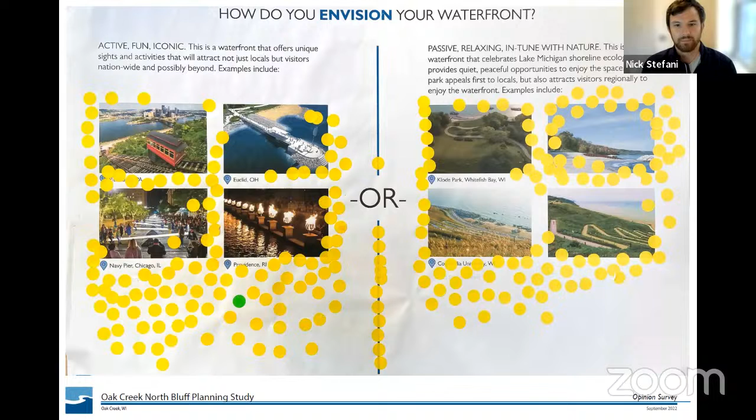So this is the summary of those options. Obviously it's pretty close down the middle. Good vote for something active, fun, and iconic, which typically comes with added cost, something we wanted to consider and keep in mind.

So we kind of had a split down both options. As you'll see, we kind of start with a more passive approach and then work our way to more intense or more active, which again is added cost, which we're fully cognizant of.

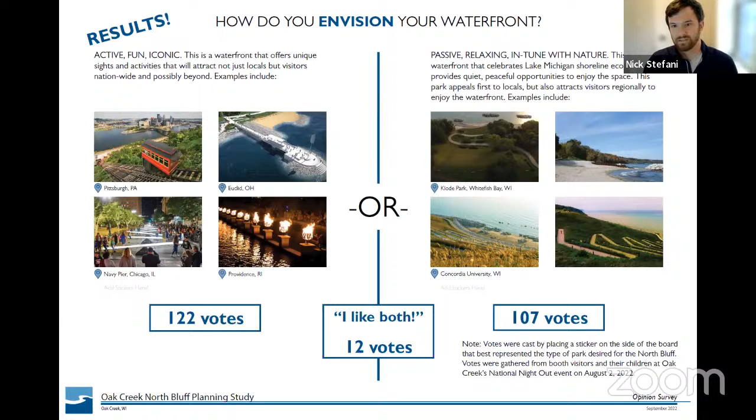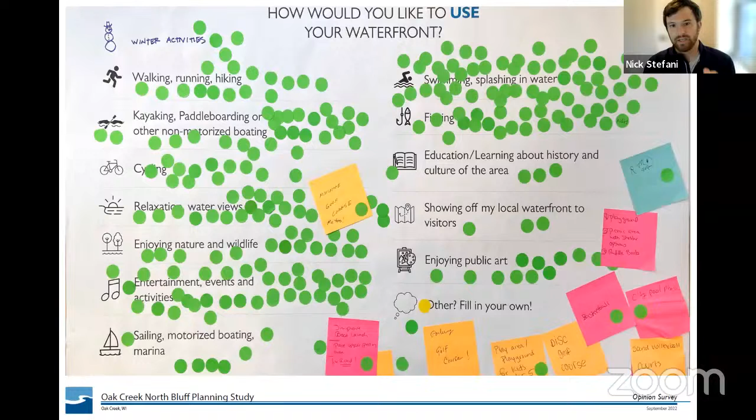In addition to that, we also wanted people at this same night to place marks and votes for what sort of activities they wanted to include at this site as part of this planning effort.

So these are the results. Swimming, splashing in water, was obviously the highest preferred.

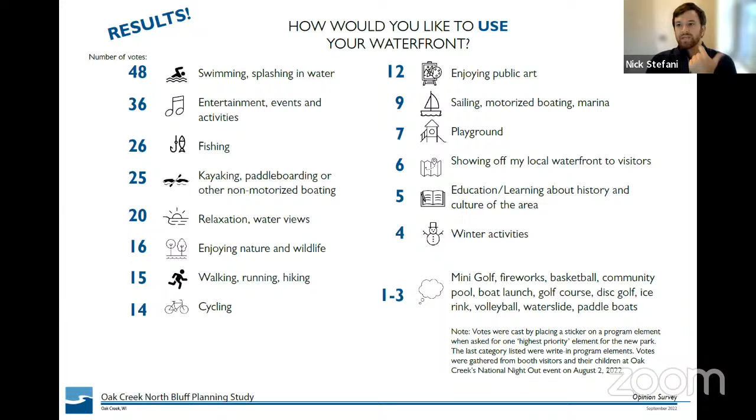Me, Dennis, Greg, and Ben were able to walk the site from basically north all the way south to Bender Park to get a good appreciation of what sort of infrastructure, facilities, and activities are currently there. We actually came across a good amount of swimming access at Bender Park, and a little bit also north of the MMSD site.

It's not nearly as popular, and there aren't many people there, but it's a very nice beach on the north side of MMSD. Part of the challenge with this particular site is that we are fairly constrained to our footprint that we're going to be able to use.

And given the way the site is laid out, there's not a lot of good opportunities to build a beach into the shoreline protection at this particular site.

So where we're going with access to the water is a little bit different, and it's not going to be quite a traditional swimming beach, but we are going to provide some options on how to construct this revetment in a way that you can still come and get close and touch the water.

Other things we keyed in on were kayaking and paddleboarding, non-motorized stuff, and being able to do different sort of activities instead of passive entertainment.

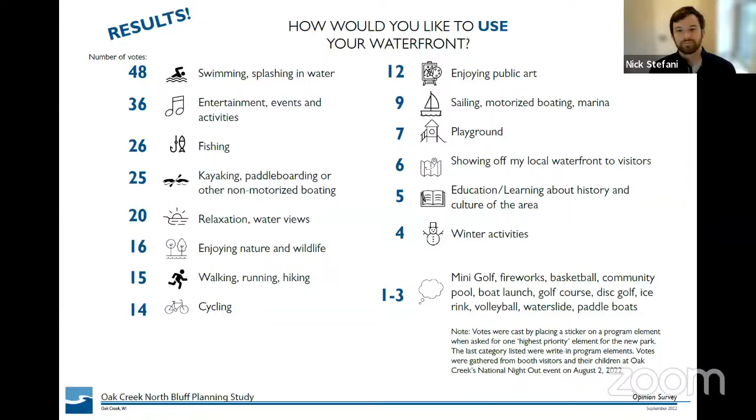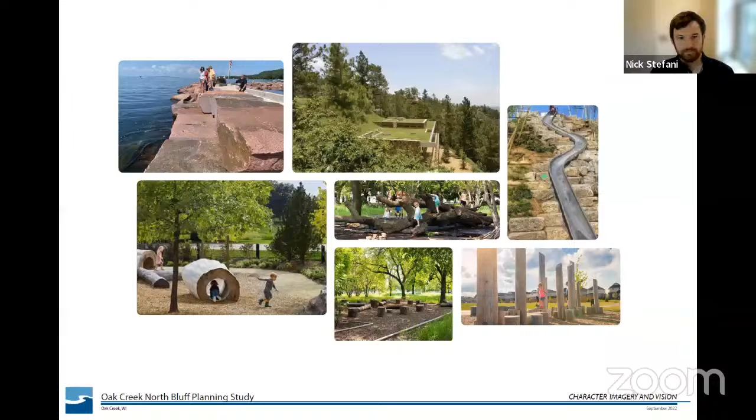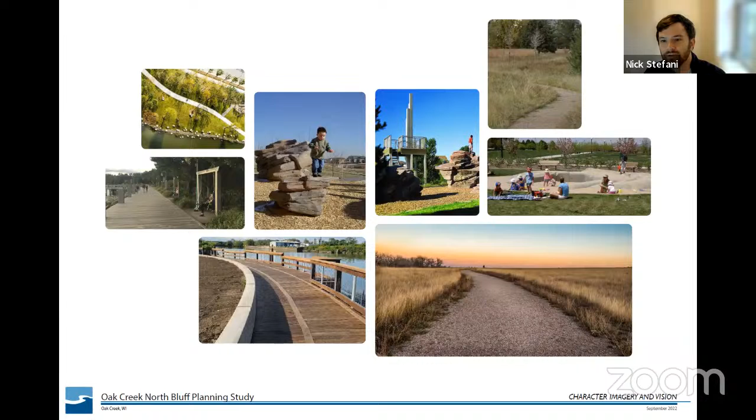At this point, I'm going to pass it off to Dennis, who was also there at the design charrette we had with the city. He's going to walk through some of these concepts and images that we put together.

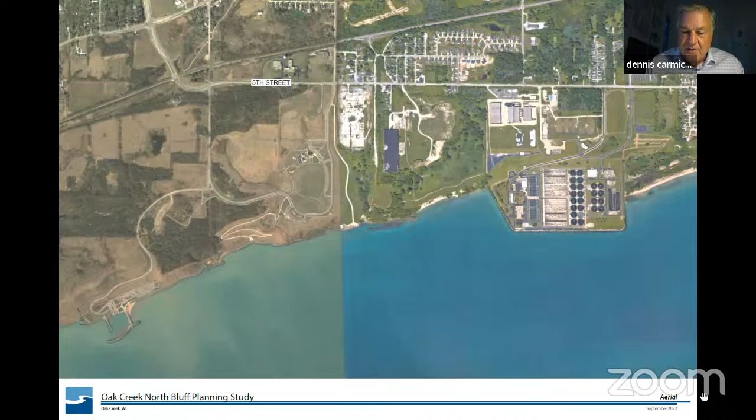Okay, good, thank you. Our team came to Oak Creek last month and spent 3 days walking the entire site from north to south, starting at Bender Park and walking to the north side of the water treatment plant. The North Bluff project is in the middle there. One of our conclusions from that walk was that North Bluff is not only a potential destination on the shore as a recreational asset, but a critical link into a longer piece of connective walkways for bicycles and pedestrians from north to south. We're quite excited about that.

We think there's a lot of opportunity here to create more than just the sum of its parts, more than just this site and its potential use. We spent 3 days working in City Hall, and most of the drawings we're going to show you tonight were created during that charrette. They're very quick, loose, and freehand—not very sophisticated. We wanted to present them in their unfiltered, unpolished version, because we have 4 alternatives to share with you this evening.

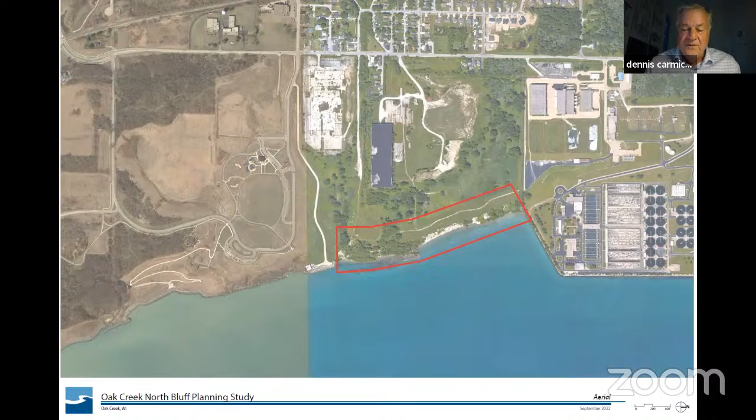We also shared these with the Parks and Rec folks last week, and we really are here to seek your input. So we will create more polished, finished graphics, but we thought it would be smarter and better for you to help guide us by showing you the raw, unfiltered drawings and the ideas that emanated out of that.

This shows the land use. You're aware that Lake Vista is a beautiful park with wonderful meadows and access down to the lake as well as upland areas. It has what we call a high road, a path at the top of the bluff, and some low road paths near the lake that people have worn down themselves—narrow and not official, but we applaud that. We think part of what we should be thinking about is creating more of these pathways, both high road and low road, with multiple options for people to traverse both elevations, and places within North Bluff for people to go from high to low that are accessible. That's part of what we learned from that walk.

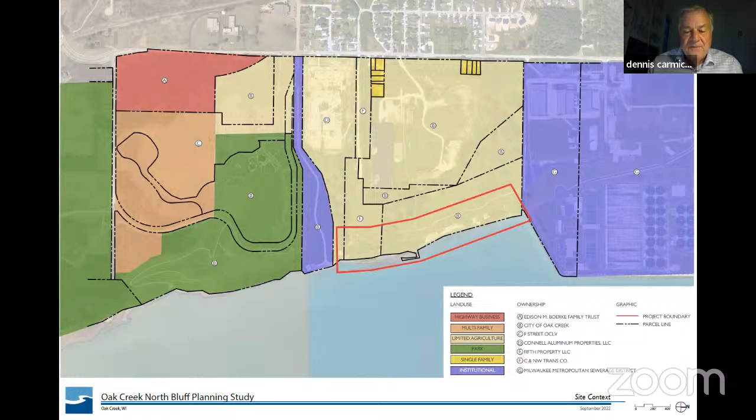Here's an analysis that begins to show some of the land uses and the potential. If you look carefully at the area of Lake Vista, we've rendered in the proposed residential development there, because we understand that is about to happen. It isn't there today, but it suggests the scale and the grain of that, and the fact that lots of people will be living there.

It also suggests some pathways from where they live into the green park of Lake Vista, and also down to the bluff. The magenta color on the right is an area we believe is potentially developable. Once the capping is done, we've been led to believe a similar kind of mixed-use development could occur also on that site.

So we've also considered ways that pathways and or roadways might go through and get to the North Bluff area, which is still surrounded by that red outline. One of the things that caught our attention was there is an existing road that goes down to the water intake plant. It is a secured road, and there's a gate up near 5th Street, and you cannot go through that gate unless you have a card, unless you're authorized.

It occurred to us that maybe there might be an opportunity, without sacrificing security, that there could be handicapped access parking down at the foot of that roadway near the lake, and or maybe bicycle access, because it's a beautiful road. It goes all the way down to the foot of the bluff and ends right near the park.

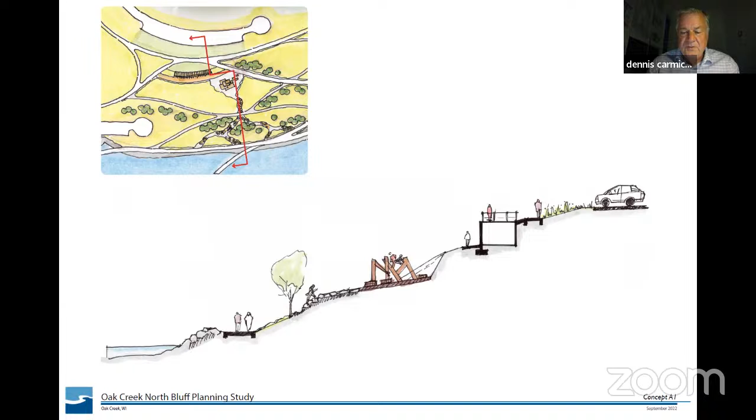This one is a slightly more active version of that same idea, with maybe a bit more rock climbing, a slightly bigger shelter building, but there's still parking on top, a little handicap parking on the bottom, and a series of pathways that wend their way up and down the slope.

What you'll notice in the pattern of the plans is there's no straight lines. One of the things we're thinking is that all of our interventions here should look as if they're shaped by wind and water, because those are the two natural forces that shape this. We're looking at a clean slate, a very clean, pristine 3-to-1 slope, so we have the opportunity to sculpt it. It's almost like being an artist, but earth is your medium.

So that's what we're proposing: these delicate, beautiful, graceful pathways that ascend and descend, many of which will also be accessible paths. There's a hierarchy of paths too — some wide, some narrow — but all intermingled with meadows, similar to what's been done at Lake Vista. We love what's been done there. The meadows are beautiful, ecologically functional, and very low maintenance. We want to emulate and extend that language of landscape with very little turf that actually has to get mowed. Most of it will be meadows.

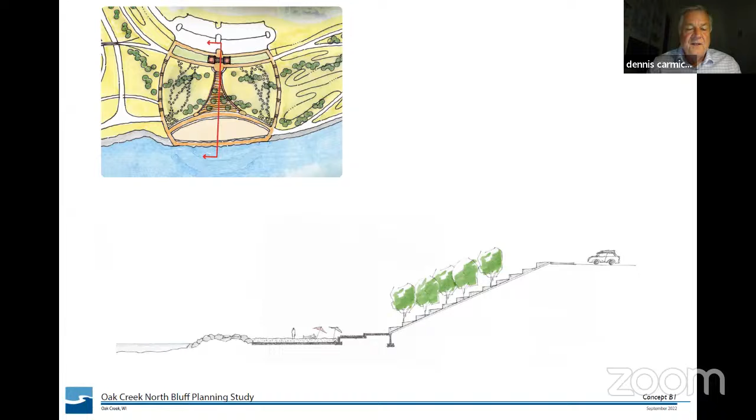You can see this notion of the perched beach where people can set up their chairs and the kids can play on the sand. It's a wonderful family activity zone.

Yeah, and this is our fourth alternative, and it shows even more intense activity. One of the things we heard from the public in a stakeholder review is they would love to see some fishing piers. So what if we did a fishing pier that goes out over the lake but curves back in? So it's not a dead end the way most fishing piers are, but it still provides that sense of getting out over the lake and allowing for fishing.

So you see that sort of parabolic shape that goes out over the lake beyond the revetment. And then you see a contained water area between the revetment and a walkway. We'll show you what that looks like in a second here. But that is not a part of the lake.

That is a wading pool. It's a very shallow pool. It is perched in the same manner that the sand beach is perched. It is not connected to the lake, so it would be chlorinated water, and we'll show you what that looks like in a second. We also have the notion here, because people wanted a landmark, we said, what if instead of the bridge, the landmark is a tower? So if you go to the next image...

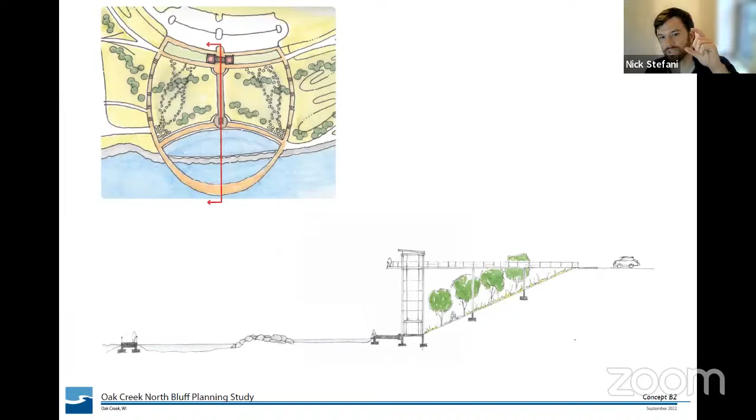Yeah, Dennis, I can start and then you can tag team for any gaps I missed. So just off the bat, if it wasn't explicitly stated, all of these options are going to have ADA options and access to various points. All of the trails that you see that are thicker are going to be graded to be ADA compliant. Some of the smaller trails in between may be steeper, maybe set up for mountain biking, so those paths won't be ADA accessible, but you'd have a similar feel to what's at Lake Vista, with long, flat slopes. We're going to try and limit the amount of switchbacks to create a different feel. But the intention is to create ADA access to the main points of activity along the bottom and along the top of the bluff. So that's probably the easiest question to address.

In terms of maintenance, no, actually I have a comment on this. When you say it's ADA compliant, are you talking about something like curb ramps for accessibility? That's on flat surfaces, but on a slope, when you're pushing a wheelchair, to go down a slab, then slope, then slab, that doesn't make it safe. So if I'm looking at the exhibit you had on the last slide showing that accessibility, or the slope, it still looks like a steep slope. If, for example, I wanted to address this, I would put an elevator somewhere so they could take the elevator all the way down. Again, I don't think having an ADA compliant slab on a slope is safe. It's mostly ADA compliant for curb ramps, not for a steep slope like this one.

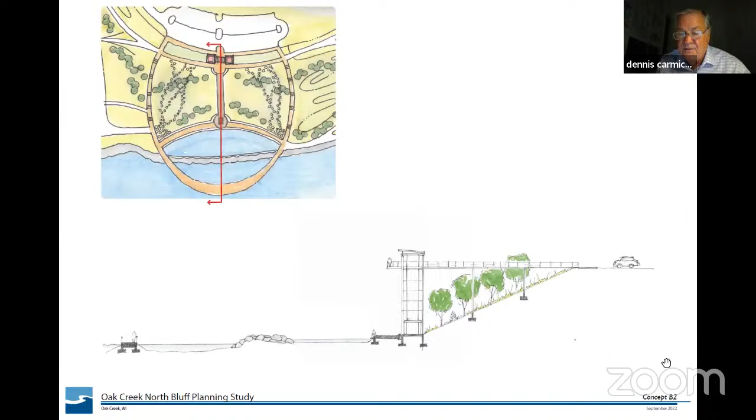Yeah, you're raising excellent points. And I would suggest that we could, in fact, put an elevator in this tower. If you all decided you're really excited about the idea of a tower but want the tower itself accessible, then the elevator is the way to go. However, that does increase the maintenance, because as we know, elevators do go down periodically. So again, what Nick is saying is there will be accessible paths that will be less than 5%, which is the ADA maximum, without ramps, guardrails, and level landings. It's just a regular slope, and there's plenty of room to do that, so we will do that under any circumstance. But you're raising an excellent point about the actual tower itself, so we could add an elevator if you all decided that was the alternative you wanted to pursue.

Go ahead, sorry. Oh, I was going to answer your other question about safety. Sorry to keep bugging you, but maybe I'm still not convinced, so I just mentioned the elevator as an alternative. And I know how costly that is, not just for installation but the maintenance cost as well, especially during the winter season, not just during summer and spring. So there's also a cost to add those curb ramps, I'm sorry, not curb ramps, the level and slope curbs for it to be ADA compliant. And also there is strain. If I'm a person pushing a wheelchair, I'll need some strength to go through that slope, stand on a flat surface, and go again through the slope. I've never seen an example like that, so I think it would be a good idea to show us a similar example to what you're proposing.

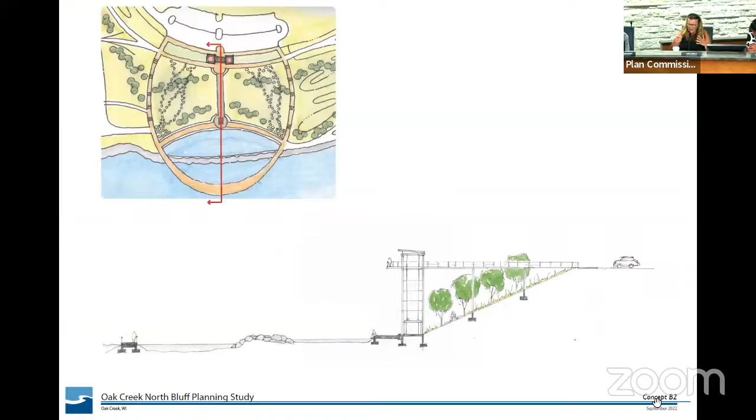And believe it or not, I usually go for the more expensive version, but I kind of like this other version better with the slides. I think that would be really interesting, to be able to stop, to be at the top and see the steps go down. I don't really see any place though for event areas. I believe to the west is a lot more parking, which was one of the things we've always been criticized for, that there's not enough parking in the park. And then bathrooms - so event areas, rental options, or where would the bathrooms be in this layout of B1?

Well, those are good questions. We didn't include bathrooms because we know that is incredibly expensive and incredibly maintenance intensive. But if you wanted them, they would likely be best located at the top of the bluff near the parking, and we would have to get access through the canal parcel to do that. So it may not be an early action item, but it's something we can certainly plan for. So sure, we can accommodate that.

I think part of our thinking here is we did not want this to become such a regional attraction that there would be thousands of people here - maybe only hundreds of people here once in a blue moon. So help us with that, help us make that decision, because we do want to make sure that whatever infrastructure we provide matches your intention for how many people you want to come here.

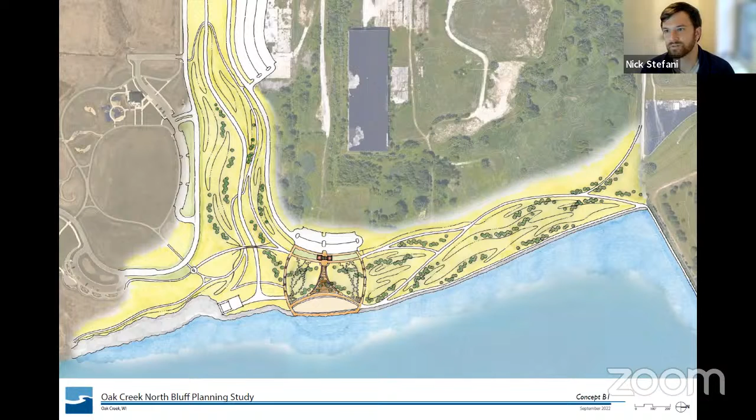Because some of the feedback we've gotten too is in terms of event space - event spaces are great, but they require people to manage those events, get those events, solicit those events. And sometimes that is or is not desirable depending on the level of desire.

Yeah, I would just love to see a place, or in the future a place, where a band could play, where you'd bring a lawn chair, something where we could gather. But I really think if people are going into the sand, or parents with children - I see it at the Drexel Town Square splash pad, those bathrooms are used constantly just to even change the kids. So maybe it's not running water, but it's a shelter or something. But I think that's going to be really important.

Greg? I guess of the different concepts, I lean towards B1, B2 - of course they're the more expensive ones. I do like a combination of the two, not necessarily the tower, I think that's kind of a little much. But I do like the stairs and the amphitheater look.

I'll echo comments that Dawn just made. Not necessarily looking for a permanent stage or anything like that, but if there's a way to lay out some of the stones - in one of the example pictures, the flatter stones - something like that towards the bottom of the stairs that was described as kind of an amphitheater look, just for a potential band to set up. Not necessarily a major event space, but just an area that could in the future be used for live music or something like that. I know that entertainment was the second most voted on item, with the first item being swimming and splashing.

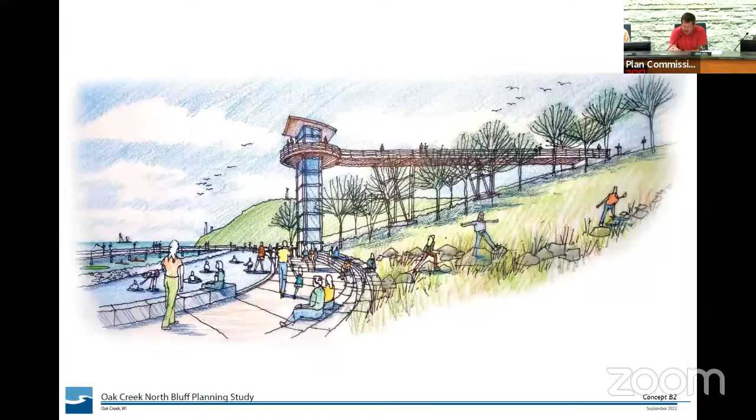Okay, and then the last thing, I really do like the concept with the slides. I know my kids and families I know, their kids would love something like that. Are you aware of 70-foot slides elsewhere that go down the slope? My only concern is we received complaints that rocks were too close to a playground in that area. I can only imagine the complaints of a 70-foot slide ending at a rocky path at the bottom. Has this been tested somewhere and proven to be safe for children to use?

Yeah, you're asking the exact correct question because you're right, I don't know of one at 70 feet. There are several in a park called Governor's Island in New York that I believe are about 40 feet tall. I've been there and slid down them and they're wonderful. They have a very long run-out area.

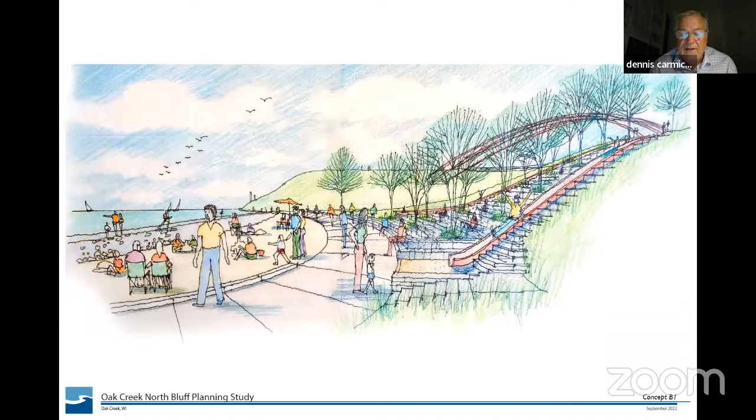Well, we totally agree with that. One of the issues we're bringing for your consideration is whether we should include handicap accessible parking down at the toe of that roadway, allowing folks with handicap tags on their vehicles to get a card that would give them card access.

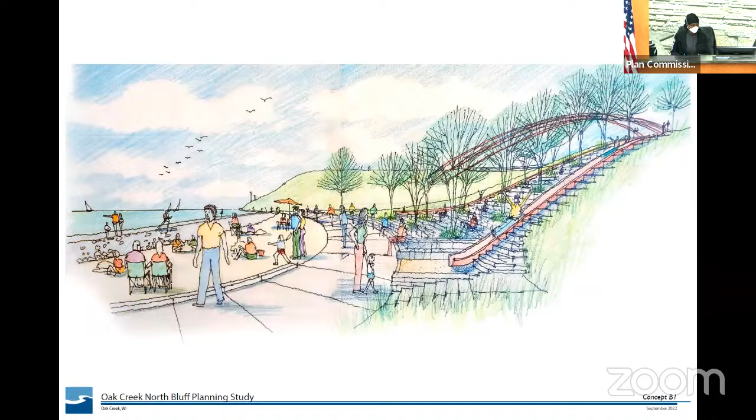Well, this is bigger than car access. This is access to this area, to the North Bluff. Yes, driving to the area is a concern, absolutely. However, you want people to have access to all levels, an upper level and a lower level. Everyone should be able to access it. It may be a different experience, but it should be roughly the same. I'd be concerned if those who are differently abled are told they can only use the lower bluff and can't go to the upper bluff because there's no accessibility. That would be my concern.

So I just want to be clear: yes, parking is a concern in terms of where you start your journey at this bluff, but while you're on the bluff, we want everyone to have a similar journey. Yes, and I'd say we share your concern.

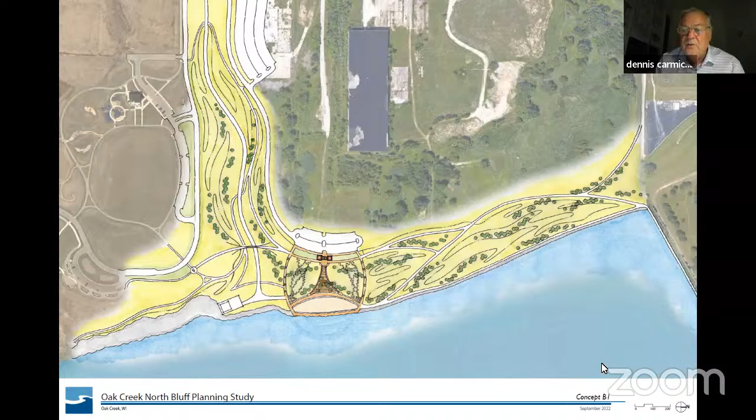The bridge we're proposing, going from bluff top to bluff top, is also the accessible path. So if you arrived at Lake Vista, you could walk across that bridge and get to North Bluff, separate from any parking. Then, as we've said, there would be multiple pathways coursing down the 3-to-1 slope, carved into the slope at less than 5%, the ADA maximum, without needing handrails or level landings. It's a much gentler slope because we have the length -- the north-south reach of the North Bluff is extensive.

It's thousands of feet, so we have plenty of ability to make that 70-foot grade change in what I'd call a very elegant, graceful, comfortable way. I think we can be well less than 5% on some of these pathways. So we absolutely share your concern that everybody should feel like they can get anywhere within the park.

Now, going to this bridge concept, is the drawing an example of showing individuals being able to walk, ride, or move on the bridge, and then cars will have access under the bridge? Yeah, absolutely. That's true. The bridge will be accessible to pedestrians, bicycles, wheelchairs, non-motorized vehicles. And we're showing a car on that roadway below, which exists already - folks that maintain the water intake take cars and trucks down there all the time.

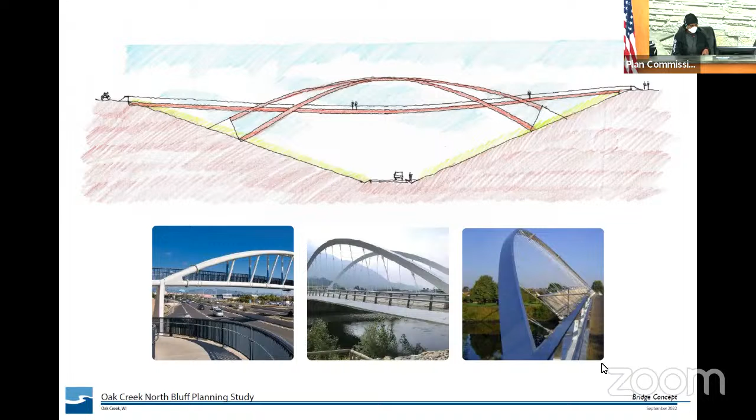So then my question would be, how would they get from the bottom if the cars are parked there? Are there stairs suggested for the sides to get to the actual crossing? Well, all we're proposing is to use the existing roadway for its main attribute, which is it has an entry right up near 5th Street where you can go in and gently descend down to the lake. Once you're down there, we're showing a few spaces and a turnaround, connecting to what we're calling, euphemistically, the low road - the pathway atop the revetment at the same grade.

And if you wanted to ascend up, you could also do that - with a wheelchair, bicycle, stroller, or anything, up several of these pathways, which would also meet the less than 5% requirement for an ADA accessible pathway. But the bridge would in fact go over it. So yes, you're correct - when you're looking at that elevation, the bridge soars above that roadway.

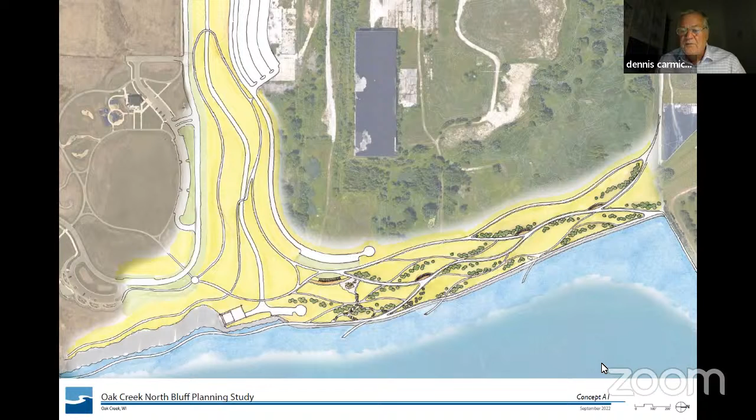Let me add a little more detail. If you're driving in a car and park underneath the bridge, how do you get to the top of the bridge? Well, then you have to get out and walk up one of the paths, and you'll probably have to zigzag a little bit - go a little bit north before you can go a little bit south, because that bridge is up there, probably about 60 or 65 feet above your head. It really connects bluff top to bluff top.

One additional item to potentially give individuals more of an 'I'm on the lake' experience - maybe part of the bridge or part of the extended bluff could have some type of glass viewing area where you can see straight down to the lake, so it's a different experience, since you may not be able to be out there. Oh, you mean like a glass paving thing so you could see through the bottom? Is that what you're saying? Yes, exactly, and see straight down.

So it could be the bridge? Well, I was thinking of the bridge, as well as what you all called the extended bluff, where you're a certain distance over the lake itself. Yeah, the bridge itself is over land, so if we did a glass bottom, you would just be looking down at the road. But you raise an excellent point - I have seen these things before where there's glass block or a glass bottom, and it can be done. It can be designed to withstand the weight of humans.

We are proposing a part of the low road - a pathway that breaks free of the revetment and actually goes out over the lake, so it doesn't touch the water intake plant. We do this for security reasons, so that if you're on this boardwalk, you cannot get to the water intake plant. That might be a good place to have a bit of a glass bottom, since you'll literally be out over the lake. But truth be told, you're only about 20 or 30 feet from the shore.

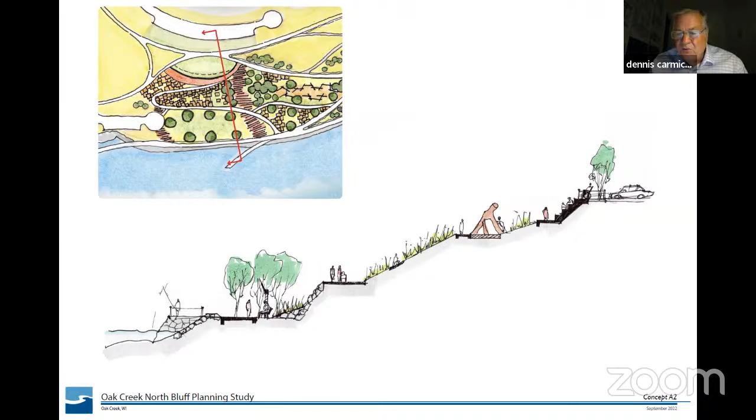This is not major - if you look at this drawing, in the lower left-hand part, you see that pair of black lines with a white thing in between. That represents a boardwalk. We do that, again, for the security of the water intake plant, but also because the stabilized bluff at Lake Vista is comprised of a lot of concrete rubble, recycled sidewalks and recycled rubble, which, while it stabilizes the slope, is not safe to climb up.

So in our judgment, we don't want people to be physically attached to the land at that point. We don't want anyone to think it would be cool or fun to try to climb up that concrete rubble, because there might be rebar sticking out - we don't think it's safe. That's why we're proposing a pathway that's actually over the lake until it connects to a safe point, an existing walkway at the bottom of Lake Vista Park.

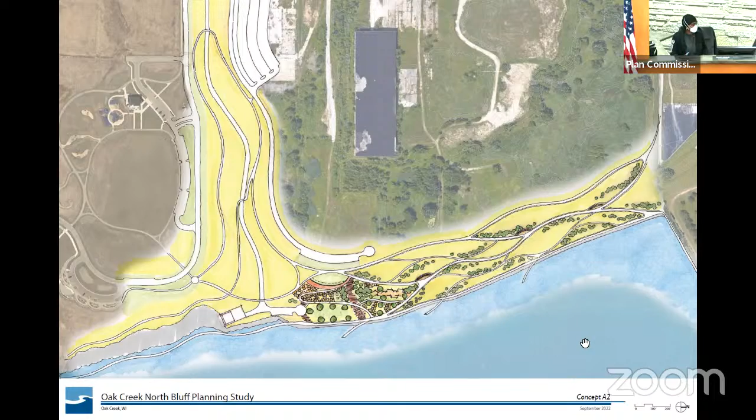And then one additional question. I also heard them speak of a walkway past the water treatment plant. Is that safe? I don't know the answer to that, to connect to an existing pathway. You might have to get back to that.

Oh yeah, that overall one. You see that blue line on the right-hand side? That's an existing pathway. It is currently not accessible, but on the eastern, northern part of the water treatment plant, there is an accessible path. We walked on it, and you can walk out there. There's fishermen out there, people looking at the lake. So our thought was, if part of it can be accessible, why can't the whole thing, and then connect to the revetment we're about to build that will create the toe of the slope of North Bluff, to make a continuous walkway.

And the reason we suggest that is because at the north side of the water treatment plant, there is a parking lot that is accessible off Fifth Street, and a pathway that already exists. So in effect, we'd be creating I think up to a 2 mile long walkway system all the way from Bender Park to north of the water treatment plant, each one of which has parking and each one of which is accessible from Fifth Street. So we think that's part of the bigger idea here. It's not just creating a destination at North Bluff itself, but creating the connective tissue, if you will, to a larger system and a larger network.

So would there be any concerns to have the public using that area behind the treatment plant? We would have to consult with them and make sure, because in this day and age, safety is everything. It's our water source, so that would have to be detailed out. I think the important point here is the connectivity.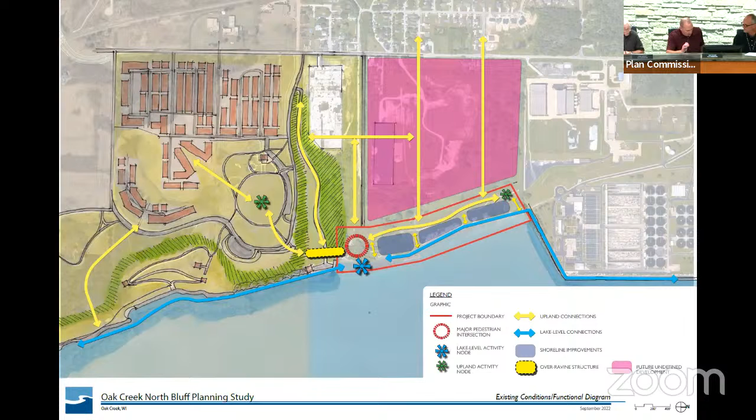I like somewhere between A and B. It looks like, just real quick, you could drive to the top, you can drive to the bottom, you have all the paths. I think the accessibility is clear, there's plenty of it. The sandbox and the wading pool, to me, you said it, we've got Bender Park, you've got water access, you've got sand. I would say eliminate that, save the money, and do some of the more things like maybe future entertainment, but keep it casual for bikers and joggers. You don't have too many people going down there in the middle of January. If you want to keep one path clear for the hardcore joggers and that kind of thing, that's probably really all you're going to get down there.

So I love the bridge, I think the bridge is cool. You've got a playground up on Vista, you could put another little something. I personally don't think the slide's necessary, kind of cool in concept, but overall I think it's looking good. I do love the pier, I love the loop pier. So the pier, yes, sandbox, wading pool, not really. Other than that, yeah, I think you guys have some pretty good ideas here.

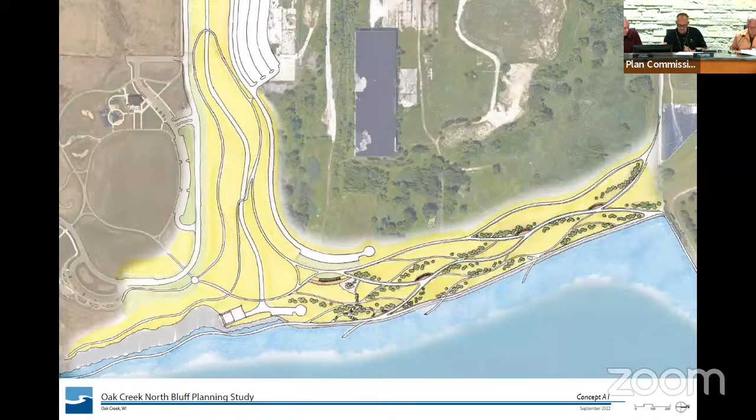That's it. Chris? Well, from my perspective, we're trying to get some functionality out of this property, so I like all of the concepts that were presented. And I like, probably between A and B like Don. I think the bridge is very awesome, and I think as long as we make sure that there's connectivity throughout the park from one end to the other. I don't think, because of Lake Vista, I wouldn't push to put in a bunch of amenities here because I think we have enough at Lake Vista.

Thanks. Assistant Chief Havey, would you like to comment from fire's perspective or a personal perspective? As long as you're sitting here?

And you've been a long time Oak Creek resident, so. Good evening. Yeah, I think that it is a very interesting concept plan.

Some of the safety concerns were addressed, so I think that would be primarily from a fire department perspective, as long as there's a safe park that's usable for all the residents. And I do see the ADA issues as well that should be addressed.

So I like all of them actually. It's getting to that point where, what's the most feasible park for the community. And from a fire perspective, you do have access to that. Our fireworks go on down there, so you guys do get down to the utility regularly, but everything has to be accessible down there. If an episode happens, it has to be able to accommodate the ambulance and the fire trucks.

Yeah, we do have a UTV type vehicle that's set up for off-road, so we've utilized that before at certain points in time. As this area develops, I think we'll have to also really look at what we are responding to, and some of those off-road areas or wildland areas that seem to be going to be more accessible in the future. Correct.

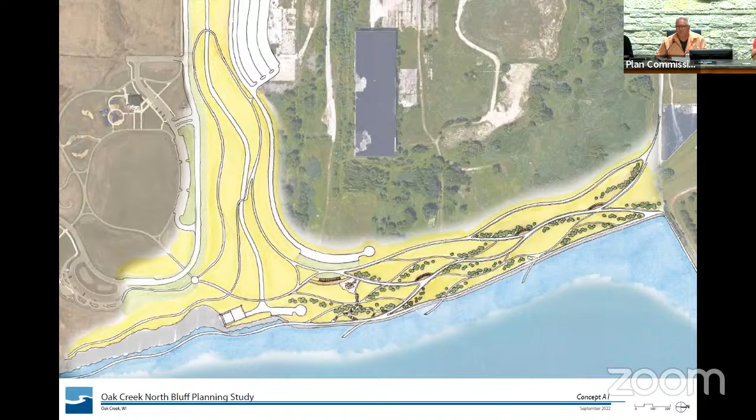It's really neat. This is coming along quickly. So I don't know where Parks fell on this. We did see this - it's a challenging site, but it's an exciting site. And I think it should complement Lake Vista. This should look like this is how it flows. So when the features are down there for benches or what have you, utilize giant stones and boulders like we do over on the north side of City Hall at Mayor Bolander Plaza, and use those natural features.

So it's really neat. And it's not to say that you can't have a little one-man band down there. I've been to Bender Park - they hosted beer gardens there, with little 1- and 2-man bands going on. But we also have that capability at Lake Vista as well if we're going to have larger crowds.

Now, people that want to go down there to watch fireworks, you'd be able to get down there on shore and camp out of sight, but it would be more natural, much like a lot of Whitnall Park is. So those are my points of view. But it's exciting, and we have a really unique piece of property and something to do here, and overall maintenance really has to be considered.

I wouldn't want to see our parks department down there trying to mow and keep grass. I would keep it a natural meadow, prairie, things like that. Actually, maybe make it a little like the Schlitz Audubon experience, where people could walk those trails through nature, and maybe naturally attract birds or butterflies or what have you. So that's my 2 cents.

Carrie, I'm going to turn it to you.

So I just want to clarify, and perhaps I should have done this at the beginning of the presentation, but I wanted to make sure that we were able to get through the slides and have this wonderful discussion. The reason that we're bringing these images to you is 2 parts, and it has been said a couple of times already. We are doing a bluff stabilization project - that is number 1. But as part of that, we were thinking, and this is why we're discussing this with you and the Parks and Rec Commission, is we have an opportunity here to actually create something unique.

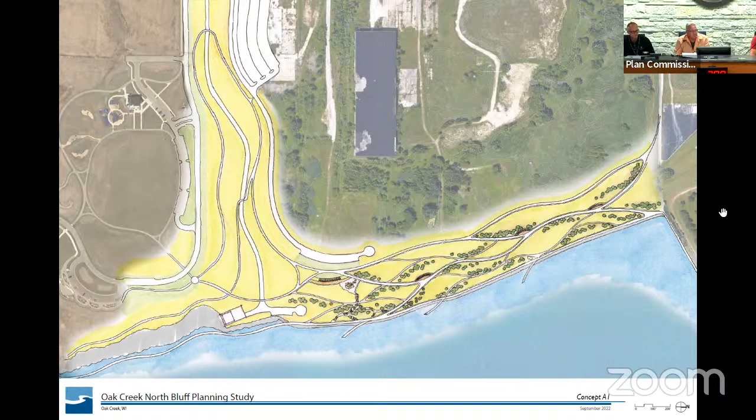Okay, moving on. Where are we? First public hearing, a sign appeal for a proposed sign for Oak Creek Hotel Associates LLC will allow the applicants to install various signs on the south elevation of the proposed building on the property at 9293 South 13th. Carrie, would you like to properly read that into the record?

Certainly. City of Oak Creek notice of public hearing before the Plan Commission. A public hearing for a sign appeal will be held September 13th, 2022 at 6 p.m. in the Common Council chambers. The appellant is Oak Creek Hotel Associates LLC, tax key 877-902-5000. The property location is 9293 South 13th Street. This is to request a variance from section 17.0604(a)(4), which states a maximum of one primary wall sign shall be permitted per lot frontage of a single tenant building. If granted, the variance would allow the applicant to install one 14-foot 7.36 inch by 8-foot 2.3 inch, or a total of 119.71 square feet wall sign on the south elevation.

The zoning of the property is B4 PUD. It's no longer a CUP - Highway Business District, Planned Unit Development. All interested persons wishing to be heard are invited to be present. Dated this 19th day of August 2022. Plan Commission, City of Oak Creek, Mayor Dan Bukiewicz, Chairman.

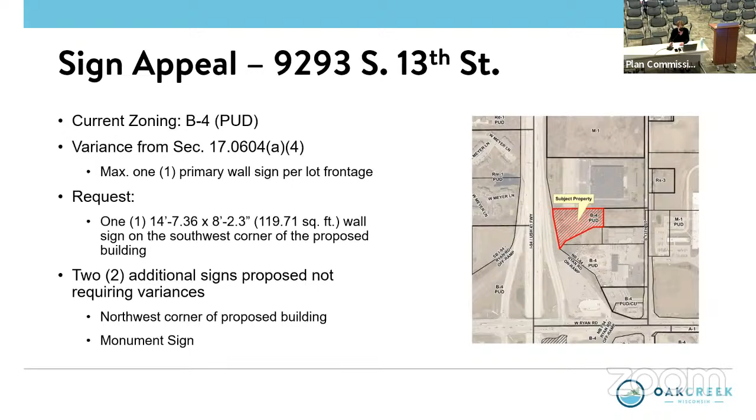The two additional signs proposed for this building do not require variances, but they're included here for your information. They may look slightly familiar. This is the location of the sign in question for the variance this evening. In terms of size, it matches the proposed sign on the north elevation and is within code compliant measurements.

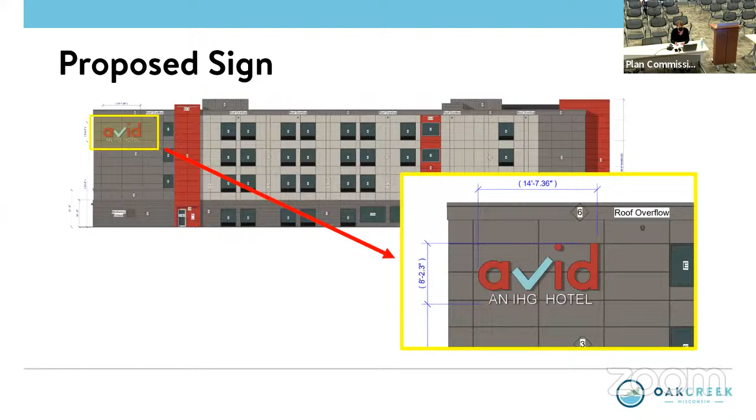When considering a variance for a sign appeal, the Plan Commission has several options to consider, anything other than content. Staff do not make recommendations when it comes to variances. If you have questions, I can certainly provide more information.

This hearing is now open. As Carrie said, we'll make three calls. This will be the first—anybody wishing to speak? Second call, anybody wishing to speak on the sign appeal? Third and final call? We will now close the public hearing and move on to consideration in 9A of that sign appeal that we just spoke of.

Is the applicant with us? You want to say a few words before I put it to the commission, or just wait on questions? I don't want to say anything. Good, okay, let's start it off.

Chauncey, you want to start? Sure, just a quick question, Carrie. I want to make sure I understand their request today. There is a sign identified for the north side which meets the requirements, yet the one on the south is in addition to that. That's the one we need the variance for. Are those the only two signs on the building? Those are the only two wall signs proposed on the building that would require a permit or Plan Commission review. The only other sign proposed that would need a permit is the monument sign, but that does not require a variance.

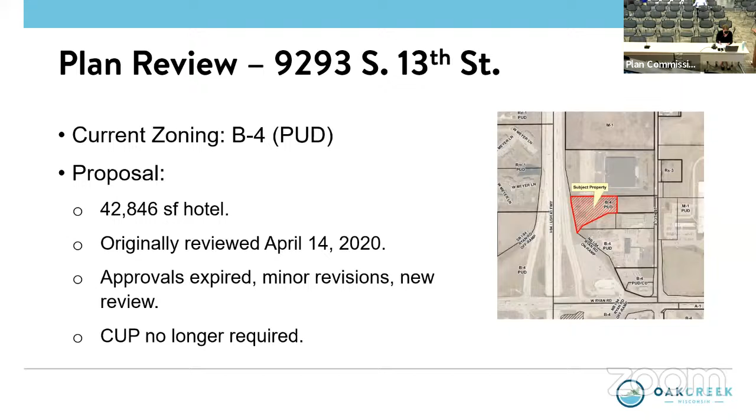So the proposal is again for a roughly 42,000 to 43,000 square foot hotel that was originally reviewed in April of 2020, and the CUP is no longer required. It is a 92 guest room facility with multiple amenities, so it's not considered an extended stay under the zoning code. It will include a market and separate pantry, fitness center, indoor pool, and laundry services. Laundry services are not self-serve coin-op; they are provided by the hotel.

It does have shared access, as mentioned under the previous item, existing through an easement that's been in place for many decades. Minimum parking requirements for hotels under the current code are one stall for every occupiable room, which would mean 92 stalls would be required. However, only 88 stalls are shown in the plans. So this is an area the Plan Commission would need to make a determination on, as to whether the additional parking stalls would be required or if 88 stalls would be sufficient.

I'll remind you that under the 2020 review, they anticipated about the same occupancy as other similar area hotels, which at the time was approximately 68.7%, equating to about 65 rooms booked on any given night. Whether that still holds true would have to be provided by the applicant. But that's how the original approval got to about 90 stalls as the requirement under the previous code, though 65 stalls was the bare minimum.

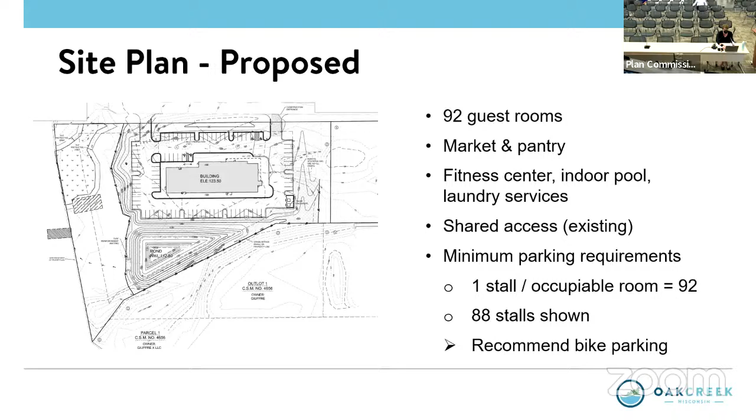We do also recommend, as part of the code requirements, that bike parking be considered for this site—simply an area for people to hitch up their bikes overnight. A bike rack would suffice.

Turning now to the landscape plan, this is pretty much unchanged from what was reviewed in 2020. However, there are some code compliance issues we need to incorporate into revised plans prior to permitting—some details are missing, related to the tree inventory and preservation and replacement plan requirements. I won't get into the real details right now. There aren't many trees on the site to begin with, but there is a requirement for identification and replacement of removal under certain criteria. So we're going to continue working with the applicant to make sure the landscape plan and tree inventory and preservation program are compliant with code.

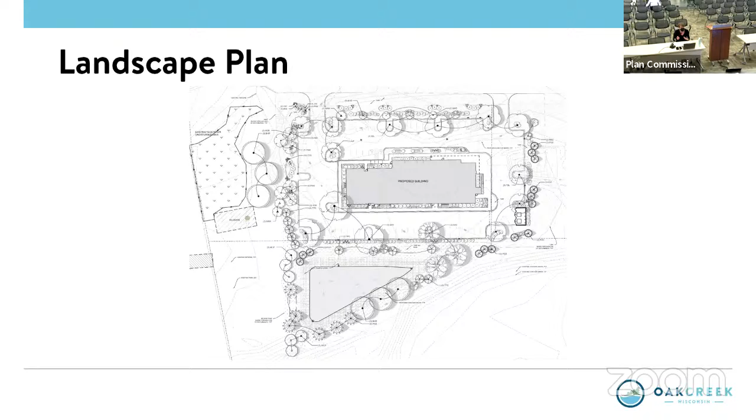This is a copy of the preservation plan. As you can see, not many trees on the site to begin with, so there's not a lot we'd have to discuss in terms of code compliance.

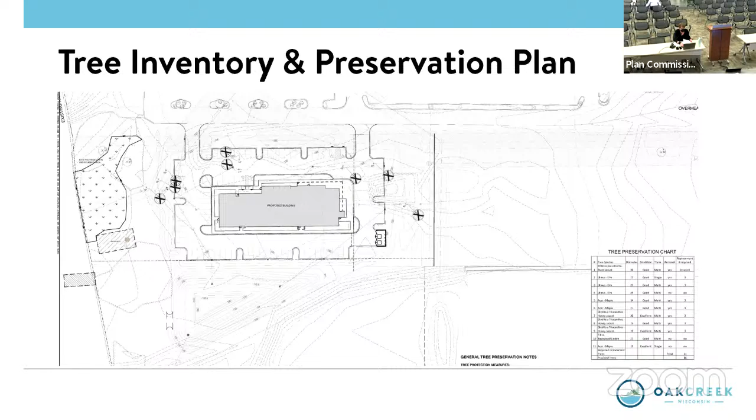Turning now to the building—a few minor additions, well, not entirely minor, compared to what we reviewed in 2020. Most of the building design is exactly the same. On the north and west elevations, you'll notice increases in the brick. We'll get into the details of the materials themselves. Most of the building is actually going to be comprised of Hardiepanel, which is not something we haven't seen in previous iterations.

We are also seeing on the plans a proposal for utility brick, which for measurement is about 12 by 4 by 4, along the base that extends around the entirety of the building on the first floor. Utility thin brick, measuring 11 5/8 inches by 3 9/16 inches, is shown again on the north and west elevations—those are your frontage elevations—on the second and third floors essentially.

Now, the current zoning code allows the use of thin brick with a minimum dimension of 1 inch on floors above the base floor. This is something we've worked with the applicants to get to. The percentages themselves aren't necessarily exactly what's required by code, but they get very close. So as mentioned in the report, this is something the Plan Commission would have to determine—whether what's shown is acceptable, or if the additional maybe 3% is something you'd hold the applicants to meet. It's a little different because on the other elevations, that brick on the second and third floors is not reflected. So this is a code compliance requirement, and it's required on the frontage elevations.

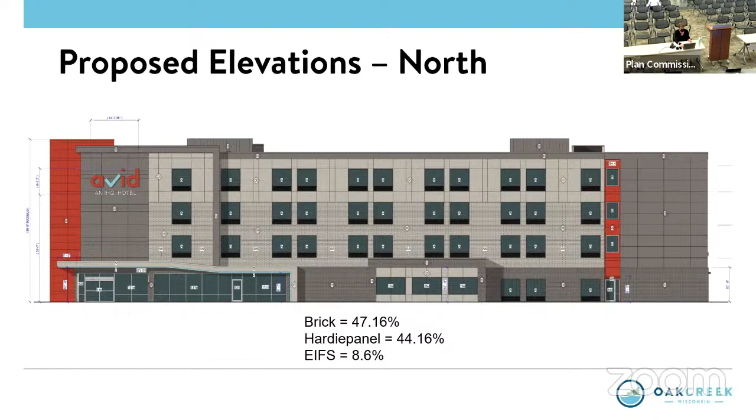EIFS as accents are utilized mostly as canopies and at the parapets. RTUs, as you can see in the north elevation, are screened with 6-foot tall metal panels. Any other mechanical units, utilities, transformers, all of those things would have to be equally screened by use of landscaping or fencing per code.

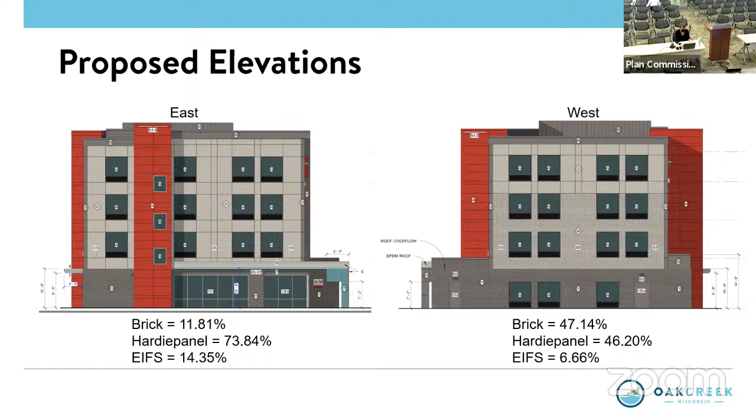So again, east and west don't necessarily look exactly the same, but there are different features on each of these elevations. And of course, the south looks relatively similar to the north, but again, that brick doesn't go up the second and third floor.

Trash enclosure is going to have brick that matches the building, metal gates on the front. It's in a code compliant location, and there is landscaping in the plan to soften those areas on the corner. This is not something that's going to be necessarily seen from the street.

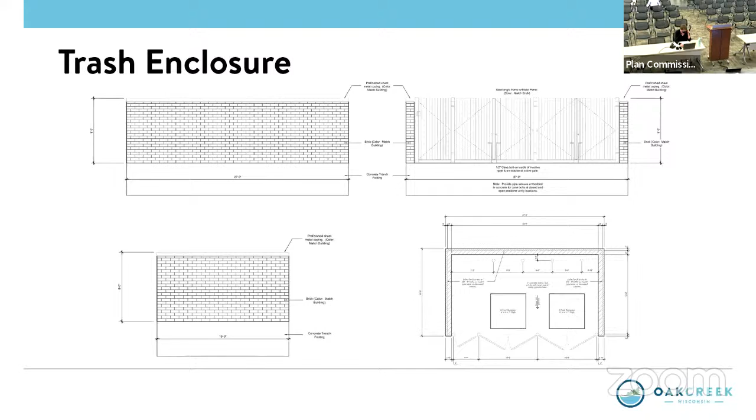Do not have anything in the slide presentations for lighting, but there was information included in your packets regarding the fixtures. We do have a maximum cutoff, a maximum of 5,000 kelvins for the parking lot fixtures, which also must be full cutoff, fully shielded, and directed downward light sources. With regard to the building mounted lights themselves, they are actually limited to lamps with a maximum of 2,000 source lumens. It's a different type of way of measuring the lighting.

They are also required to stay on the building, essentially. You can't go over the building lines, and they cannot be mounted above the highest point of the building. These are not located in an area where they would have an issue with spillover, or they're not proposed to be mounted too high anyway. So it's really just a matter of making sure that those maximum color temperatures and lumens are met in the code.

We mentioned the signs previously, and I'm not going to go into that here. Monument sign is going to be outside of any easements. It's going to meet all of the setback requirements. And of course, the 2 signs on the building we've already talked about.

One more thing to mention, there was a requirement under the previous review, and it's going to be something that has to happen for this one as well. There is a requirement for reauthorization of the Army Corps of Engineers determination, as well as any DNR permits or approvals. They are aware of that, and they're working toward that right now.

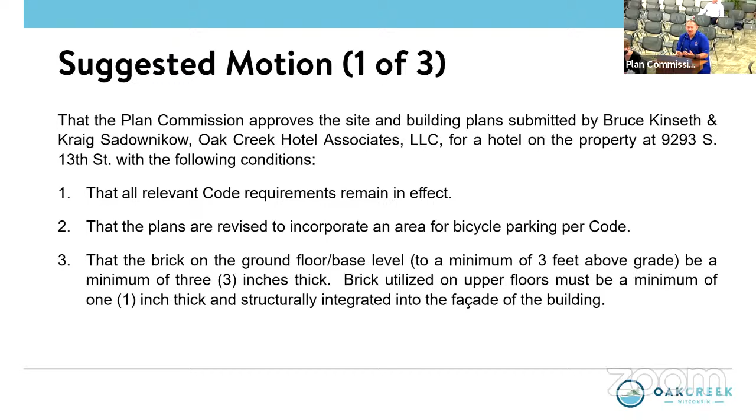The previous application, the shared access was accommodating for the fire department, but I just wanted to stipulate that the shared fire protection is not part of that. We would need to have private fire protection also for that separate building, because what is on Steinhoffels property is private fire hydrants. So shared access is okay, but the private fire protection lines will need to be installed for that development.

That was always the case even in 2020, correct? I just wanted to make sure, because 2020 is a little bit fuzzy, so I wanted to stipulate that. I was going to say, if that's something that changed in 2 years. Yeah, I believe it was, but I just wanted to make sure that was stipulated.

Okay, thank you. I myself have no questions either, and Greg pretty much put the parking to rest, so I think we're good. Looking for a motion then. Oldani.

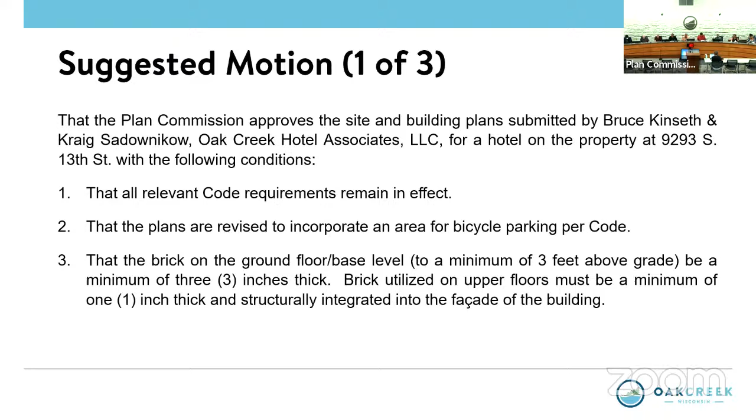Moves that the Plan Commission approves the site and building plan submitted by Bruce Kinseth and Kraig Sadownikow, Oak Creek Hotel Associates LLC, for a hotel at the property at 9293 South 13th Street with the following conditions: 1, that all relevant code requirements remain in effect. 2, that the plans are revised to incorporate an area for bicycle parking per code. 3, that the brick on the ground floor base level to a minimum of 3 feet above grade be a minimum of 3 inches thick, and brick utilized on upper floors must be a minimum of 1 inch thick and structurally integrated into the facade of the building. 4, that the plans are revised to include locations for all mechanicals, transformers, and utilities.

All mechanical equipment, transformers, and utility boxes, ground, building, and rooftop, shall be screened from view. 5, that lighting plans are revised to meet code requirements. All light sources shall be full cutoff fixtures with light source fully shielded and directed downward. The color temperature of non-building mounted fixtures shall be limited to a maximum of 5,000 kelvins. Architectural accent wash lighting and wall-mounted lighting are limited to lamps with 2,000 source lumens or less, shall not spill over roof lines or building edges, and shall not be mounted higher than the highest point of the building, excluding RTU screens. 6, that permits are obtained for all signs.

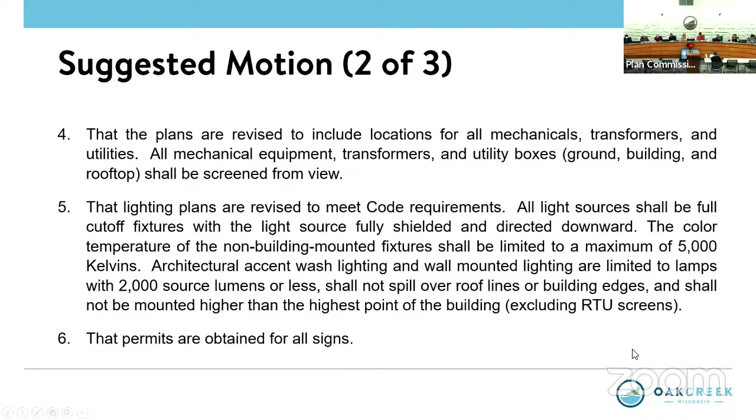7, that the landscape plans and tree preservation and replacement plan are revised to meet code requirements. 8, that reauthorization of the Army Corps of Engineers permit is obtained, and any Wisconsin Department of Natural Resources approvals or exemptions are renewed, with copies provided to the city prior to submission of building permit applications. 9, that all revised plans - site, building, landscaping, etc. - are submitted in digital format for review by the Department of Community Development prior to the submission of building permit applications.

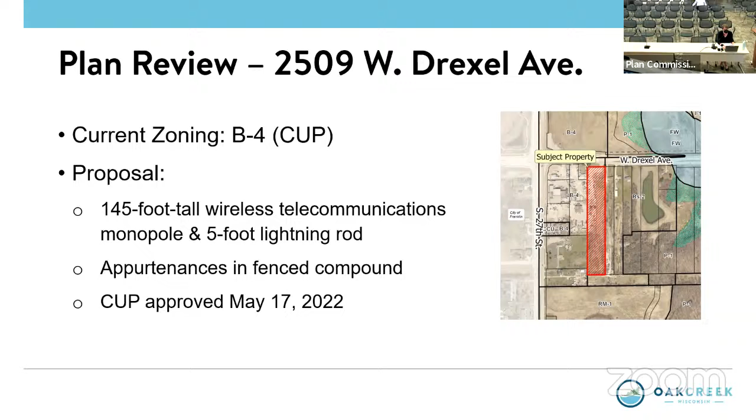So the site plan has not necessarily changed much or at all from what was reviewed during the conditional use permit consideration. Again, there are no existing buildings on the site itself. It is not going to be an illuminated site. This is simply a pole with appurtenances within a gated and fenced compound, as the mayor stated.

The leased area is a little bit larger than what the gate will be. It's a 70 by 80 leased area, and the enclosed area is going to be 65 by 75, enclosed with a 6-foot tall chain link fence with about a foot of barbed wire on top. That'll be accessed by a 30-foot wide easement from Drexel Avenue on the site itself. The gravel driveway is 12 feet wide to the site.

Within the enclosure, the pole, the equipment, and future carrier lease areas are all required to be within the gated area. The only exception, as we mentioned during the conditional use permit review, was a bollard, transformer, and fiber optic vault. That's just outside of the fenced area, but it is still within the 25-foot wide utility easement on the property, so staff have no concerns. That had to be outside for various reasons, particularly for access by We Energies.

As mentioned in the staff report, green infrastructure is also required for this project. Those plans need to note the net increase in impervious surface with the project as well. Rain gardens were included in the plans, but they do need to have permits issued by the engineering department. The one thing that was missing, mentioned during the conditional use permit review and reiterated now, is that even though we got a letter of non-objection from the FAA, we did not get anything from Milwaukee County Airport specifically. So if that could be provided prior to any permits being issued, we'd appreciate it.

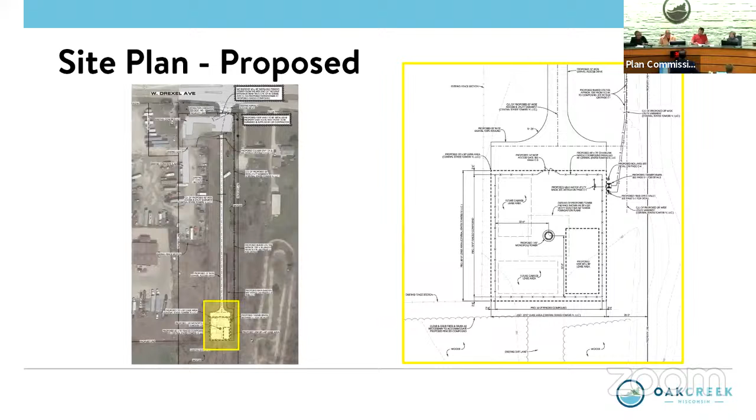Thank you, Ashley? Nothing from me. Ron? Nothing for me. Nothing from me either, and I'll just make the comment—from my house there's actually 2 poles located nearby that I could probably see if I tried, but now that they're in and they blend, I don't even notice. One's right behind our DPW, and you don't even notice it anymore.

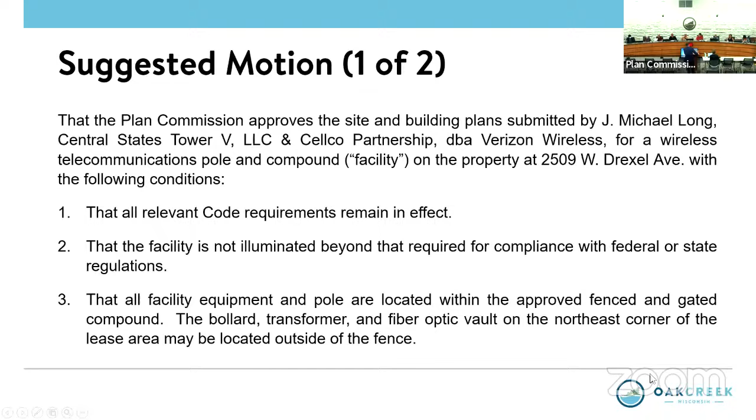I have nothing, so we can go for a motion on that. Clerk moves to approve the site and building plan submitted by J. Michael Long, Central States Tower V LLC, and Cellco Partnership, DBA Verizon Wireless, for a wireless telecommunications pole and compound on the property at 2509 West Drexel Avenue with the following conditions: 1, that all relevant code requirements remain in effect; 2, that the facility is not illuminated beyond that required for compliance with federal or state regulations; 3, that all facility equipment and pole are located within the approved fenced and gated compound, though the bollard, transformer, and fiber optic vault on the northeast corner of the lease area may be located outside the fence; 4, no signs other than those required for compliance with federal or state regulations are approved; 5, grading and green infrastructure plans must be approved and permitted by the engineering department; 6, approval from Milwaukee County for compliance with General Mitchell International Airport siting and safety requirements shall be provided to the Department of Community Development prior to submission of permit applications; 7, that all revised plans—site, building, landscaping, etc.—are submitted in digital format for review by the Department of Community Development prior to submission of permit applications.

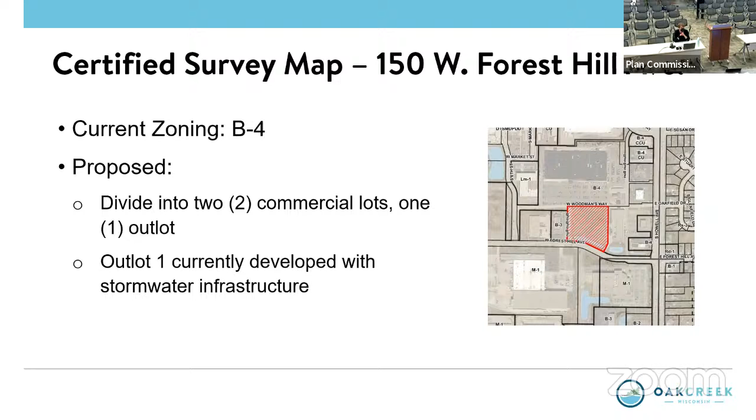There is a proposal for new easements on sheet 3, but for clarity, staff is recommending that sheet 1 just say see subsequent sheets for any and all easements. It's just a little bit easier that way. We often see that people only get sheet 1 of a CSM and then they don't realize that there are other things happening on the property unless there's a notation. That's why we like to see everything on the first one, but understand that not everything can be legible when you have it all on sheet 1.

So please note, on sheet 1, all easements are on subsequent sheets. The proposed lots are code compliant in terms of dimensions and minimum lot size requirements.

There does need to be an agreement between the 2 created lots for access and maintenance and responsibility of the stormwater infrastructure in Outlot 1. That does need to be recorded, and that copy does need to be provided to the city, but a notation does need to be included on the certified survey map that such is required. The stormwater facility needs to benefit both lots. That needs to be explicit.

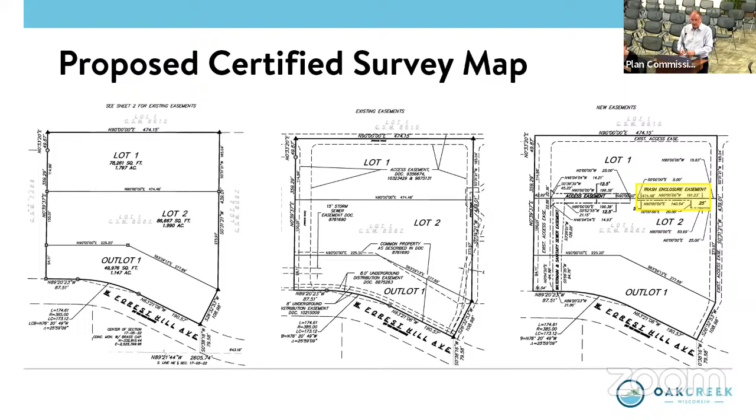Is there a peek ahead? You know, if you take everything around Woodman's, to the Burger King and beyond, they're all front facing Howell Avenue, and the access comes from the back, the north or south, but they're facing east. Now we've got a building that's doing an about face in the whole thing.

This would be face to face with the existing daycare center across the street. It would be, but that's also the side that the daycare faces on Forest Hill. Of course, they don't have the access issue you do. Our primary entrance will face- I don't care where the primary entrance is, I'm just saying the face of the building, I'd like to see it facing Forest Hill.

That's something that can be conditioned as part of site and building plan review, because the daycare itself doesn't require conditional use permit review. The next item is actually just about the exterior recreation area, the private playground. But yes, those concerns can definitely be addressed as part of site and building plan review.

I know you've engineered and did your due diligence on how you want to split it. I'm just saying if you split it north to south, lot 1, lot 2, whichever way, you'd have access on east and west, the buildings would face front, and wherever you put the parking in, it's yours. You just have to go through conditions and restrictions to make sure the building doesn't look backwards to the rest of the development. I guess that's where I'm going.

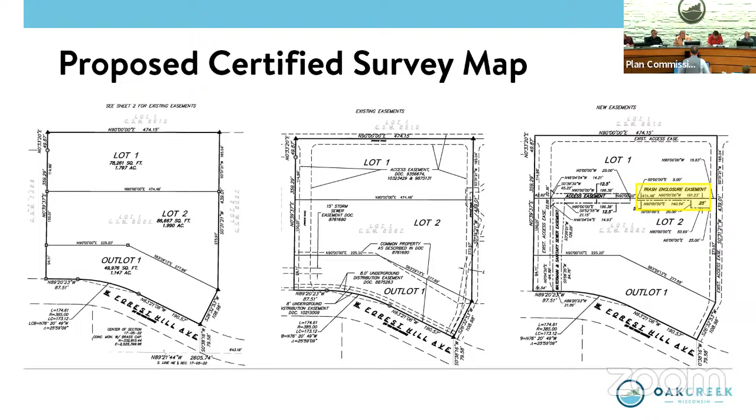Okay, that is it. Any more questions, commissioners? Okay, motion then on D, please.

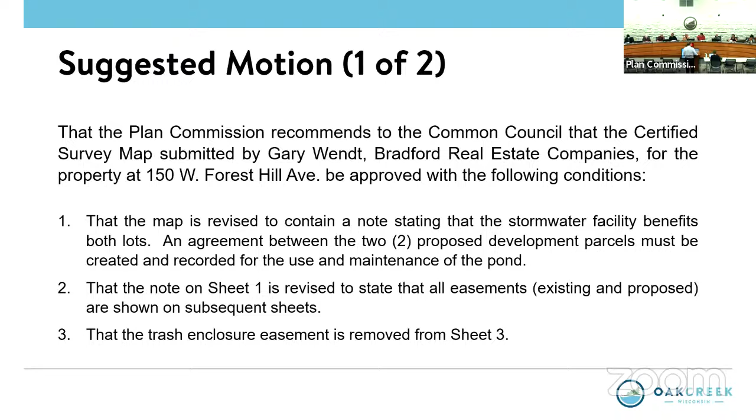Mark moves that the Plan Commission recommend to the Common Council that the certified survey map submitted by Gary Wendt, Bradford Real Estate Companies, for the property at 150 West Forest Hill Avenue be approved with the following conditions: 1, that the map is revised to contain a note stating that the stormwater facility benefits both lots, and an agreement between the two proposed development parcels must be created and recorded for the use and maintenance of the pond; 2, that the note on sheet 1 is revised to state that all easements, existing and proposed, are shown on subsequent sheets; 3, that the trash enclosure easement is removed from sheet 3; 4, that all bearings and distances are included in the legal description under the surveyor's certificate; and 5, that all technical corrections, including but not limited to spelling errors, minor coordinate geometry corrections, and corrections required for compliance with the municipal code and Wisconsin statutes, are made prior to recording.

Lonnie seconds. Roll call. Chris, you want to start us? Guzekowski, aye. Holdani, aye. Sleeper, aye. Chandler, aye. Anna, aye. Grillo, aye. Jinsky, aye. Clark, aye. David, aye.

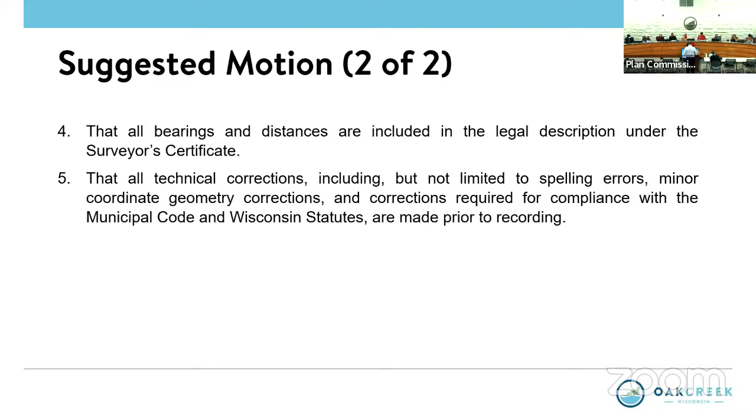Okay, that'll get us to 9E, conditional use permit for an outdoor recreation facility, private playground, on the property at 150 West Forest Hill. Thank you, Mr. Mayor. Just want to reiterate again, under the existing code, we do not require a conditional use permit for the daycare. However, it was kind of difficult to separate the two when discussing them in the report. So the conditional use permit is still going to be just for the private playground component of the daycare facility. The extra information is for Plan Commission edification, making a little more sense of what's being proposed on the site itself, and giving you an idea of what may be coming down the pike for site and building plan review considerations.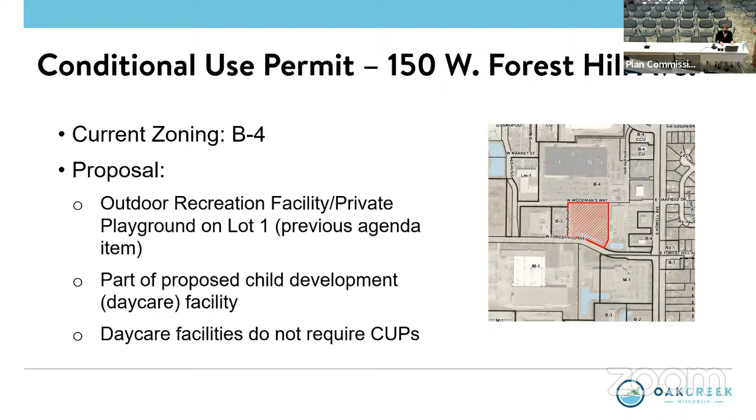And of course, with the concerns regarding orientation of the building, site-specific planning, etc. The outdoor recreation facility and private playground is on lot 1 of the proposed CSM, which is the northern lot. Daycare facilities don't require CUPs, but this will be operated by the Learning Experience.

On the screen right now is a conceptual site plan. It is proposed to have a 10,000 square foot single story building on lot 1. It does show shared access at this point with lot 2, part of the access easement shared between the 2 lots on the CSM.

You can kind of ignore the trash enclosure on the east side of the property, that trash enclosure easement has been removed from the CSM. The 5,000 square foot outdoor play area is on the east side. We will get to that in just a moment.

For the rest of the facility, they have a maximum capacity of 159 children that they can accommodate, per their state license. However, there is some information provided that says their anticipated average enrollment is about 80%, and they are anticipating up to 25% would be part-time enrollees.

The building itself and outdoor areas would be controlled, monitored, and alarmed, and up to 23 employees would be on site at any time during the hours of operation, 6:30 to 6:30, Monday through Friday. There are no weekend hours proposed at this time. So that private playground facility would be completely off limits outside of operating hours, unless they decide to provide some kind of controlled access to people outside of those operating hours, which has not been presented at this point.

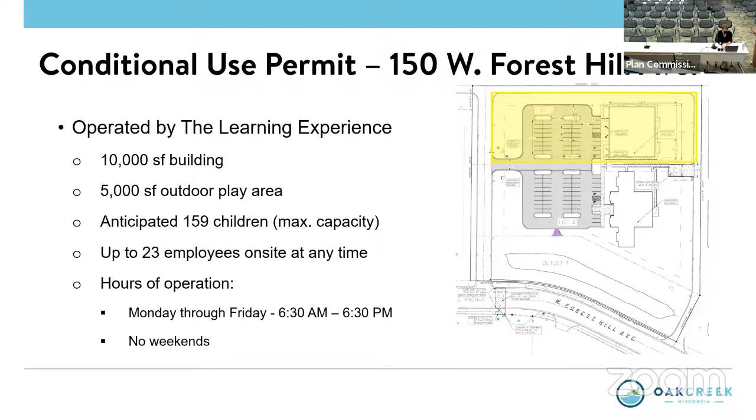Really, there's not a whole lot of criteria within the code for a private playground facility. But there are minimum parking requirements in the code when it comes to an outdoor recreation facility versus a private playground. The outdoor recreation facility assumes this isn't just catering to children who cannot drive, so under that, the minimum parking requirement is 1 stall for every 3 people at maximum capacity. That just doesn't apply here, it doesn't make sense.

The private playground requirements are based on a private parking study, which we don't have, but absent that, we do have their peak times based on other locations for pickup and drop off. With that in mind, there are peak drop off and pickup times calling for about 22 to 23 vehicles at a time. And if they're looking for up to 23 employees to be on site at any time, one could argue they would need at least 46 parking stalls.

Since we do not know, and this is not part of site plan review tonight because this is just the conditional use permit, this is just food for thought for what's coming down after this review. There may need to be changes to that site plan based on what the requirements are going to be. We don't know what Lot 2 is going to develop with. So we can show shared access, shared parking, a building configuration, but until that gets proposed, we have to consider each site on its own merits and its own code compliance.

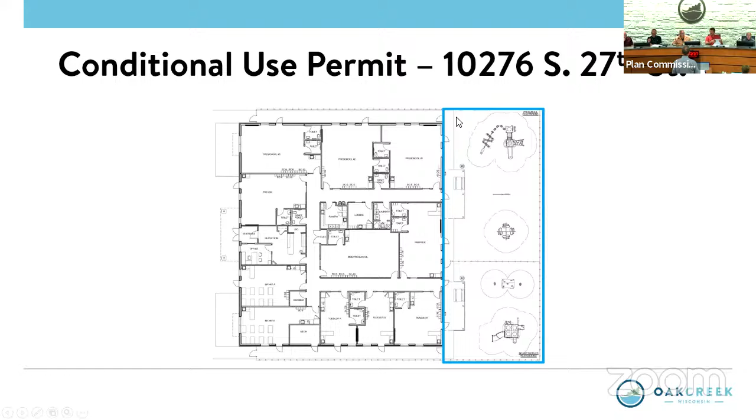So with that in mind, there is a suggested motion for Plan Commission consideration on the screen. Mr. Mayor, on the previous slide, that's the wrong address, isn't it? It is, my apologies, that is a holdover from a previous slide. Just to be clear, we are talking about 150 West Forest Hill. Yes, okay, super.

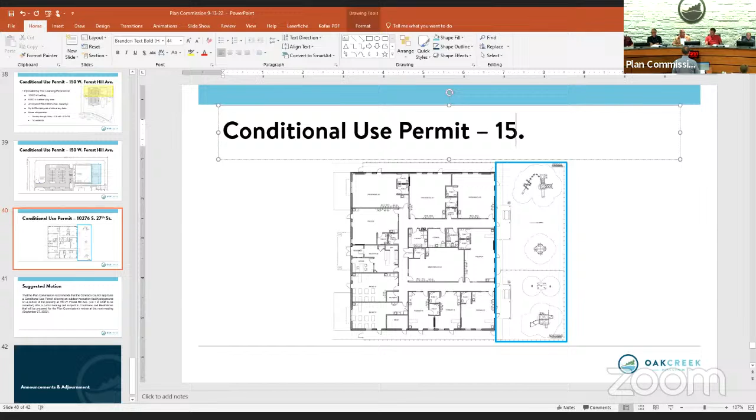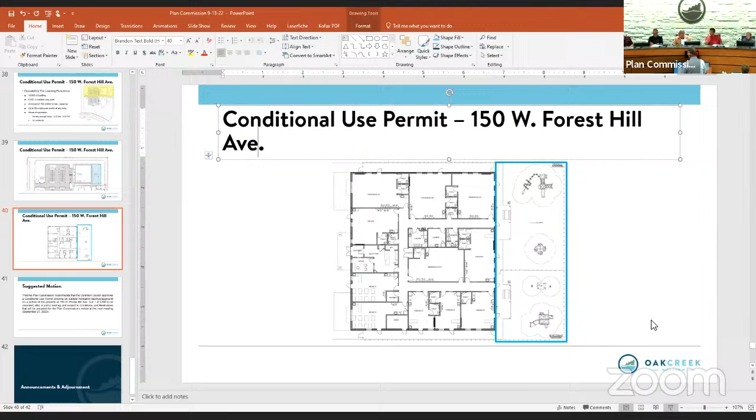Want a few words, sir? Anything, or you want to wait on questions? Okay, I'm good. Chauncey, you want to start? No questions, thank you. Fred? No questions. Don? No questions. Chris? I had no questions either. Greg? I have no questions, thank you. Okay, Ashley? No questions, thank you.

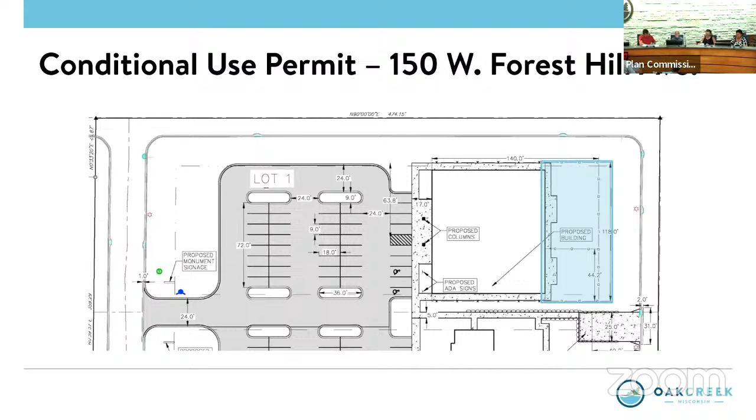No question, I was just asking Carrie how is this close to 27th Street? I started to Google it. Nope, sorry, every other slide was correct. That one was just a typo, it's just a holdover from a previous slide.

You know, I mean, it's a daycare. We definitely need the children to get out there and do what children do, and we need it. So I'm good with it, but I think Carrie laid it out pretty well. There's some site issues that they'll work through with staff. I'm confident.

I do have one question. When do we address the mayor's concern about the site and building plan review? The applicant, a lot of what was said tonight is really intended for the applicant to take that into consideration when creating the plans for the next step. So it's really kind of a preview and a little bit of a guide for developing those plans. And even though it's not pertinent to the conditional use permit itself, I'm sure it's helpful, but yes, it'll be for site and building plan review. Thank you. Okay.

Can we get a motion on E then? I move that the Plan Commission recommends that the Common Council approves a conditional use permit allowing an outdoor recreation facility slash playground on a portion of the property at 150 West Forest Hill Avenue, Lot 1 of CSM, to be recorded after a public hearing and subject to conditions and restrictions that will be prepared for the Plan Commission's review at the next meeting, September 27th, 2022.